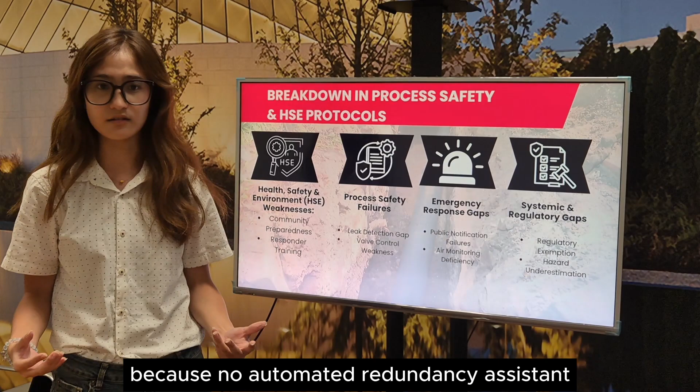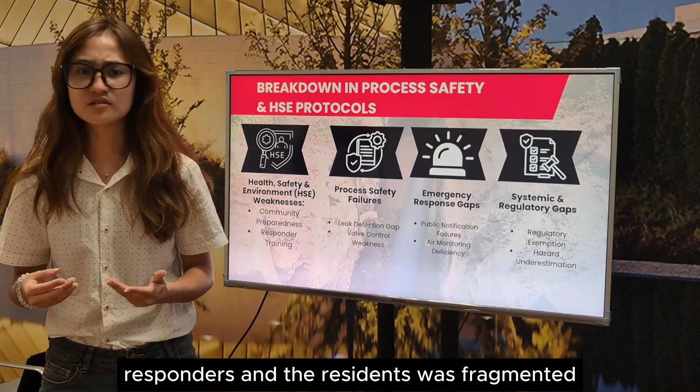The second issue is emergency response gaps, where public notification failed, air monitoring was deficient, and containment dragged until 8:22 p.m. Communication between the operators, responders, and residents was fragmented, leaving residents confused and unprotected.

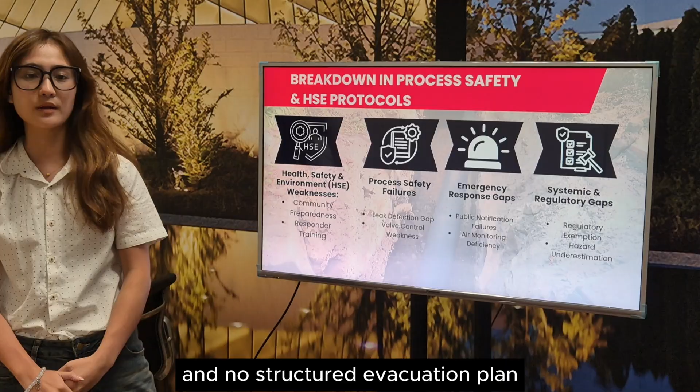The third point is HSE weaknesses. The community had no prior drills and no structured evacuation plan. Many didn't know carbon dioxide is invisible and asphyxiating, which prolonged exposure.

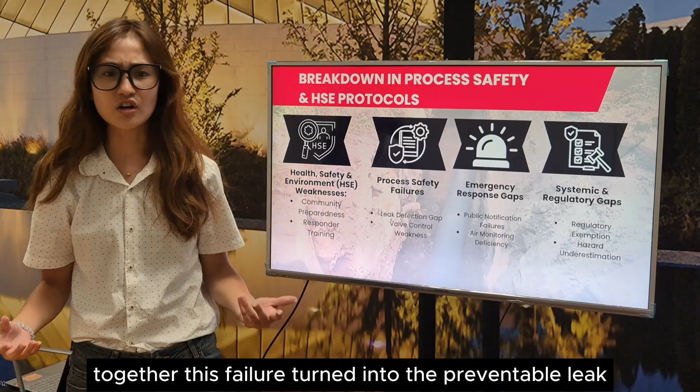Finally, there are systemic regulatory gaps where pipelines face lighter regulations than oil and gas. Hazards were underestimated under the non-toxic label, and management culture showed more focus on production than prevention. Together, these failures turned a preventable leak into a major public safety crisis.

After inspecting the pipeline, we found there are 4 major root causes of the leak: equipment failure, human and operation factors, design flaws, and systemic issues.

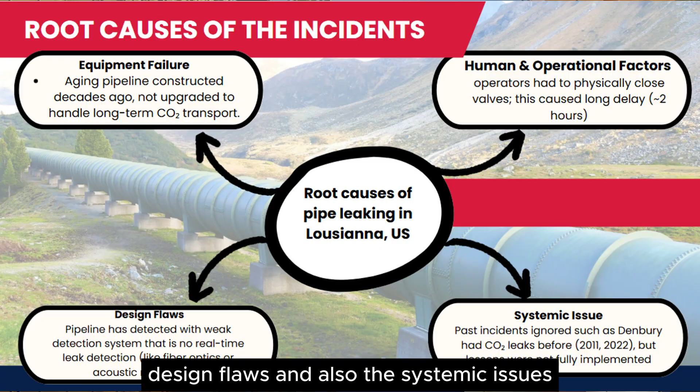One of the major root causes is equipment failure. The aging pipe was built decades ago and without upgrading for long-term carbon dioxide transport. Corrosion and wear from water impurities caused cracking, while monitoring equipment failed, cameras went offline, and sensors were insufficient.

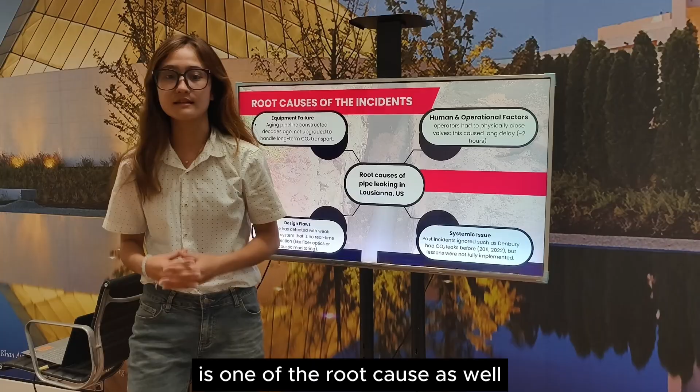Second, human and operation factors is one of the root causes as well. Delayed responses by hours without closing the valve, communication between control centers, field staff, and first responders was slow, and training on carbon dioxide leak behavior was lacking.

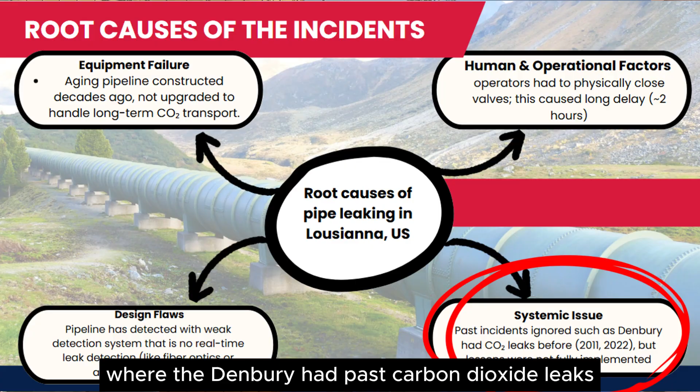The third significant root cause is systemic issues, where Denbury had past carbon dioxide leaks in 2011 and 2022, but lessons were ignored. Safety leadership was weak and continuous improvements were missing.

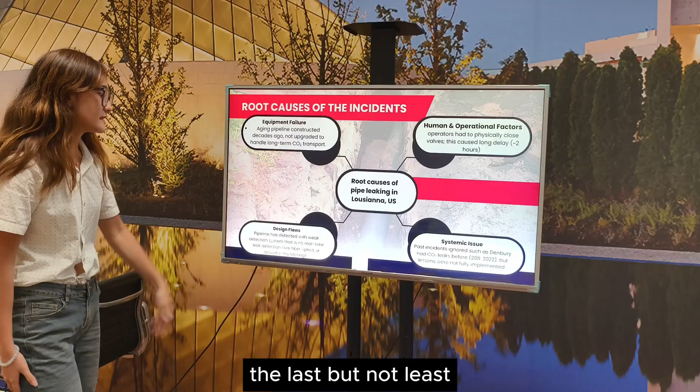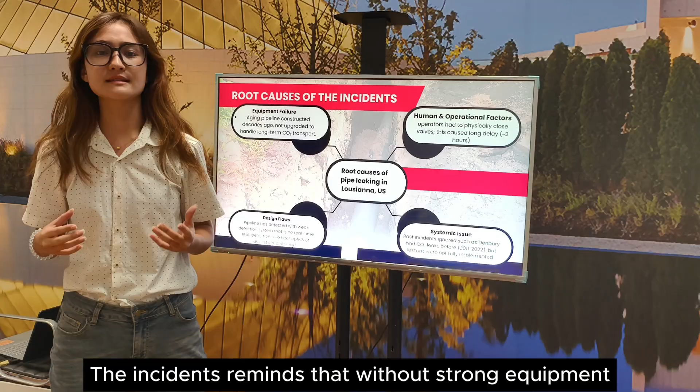Last but not least, design flaws is also one of the root causes, where the automatic shut-off valve had no redundancy and detection systems were too weak to provide real-time alerts. This incident reminds us that without strong equipment, operations, leadership, and design, pipeline safety cannot be guaranteed.

Today, we are proposing a safer and more efficient carbon dioxide transport and storage system for ExxonMobil Louisiana through 3 groundbreaking systems: AI plume modeling, smart monitoring, and automated containment.

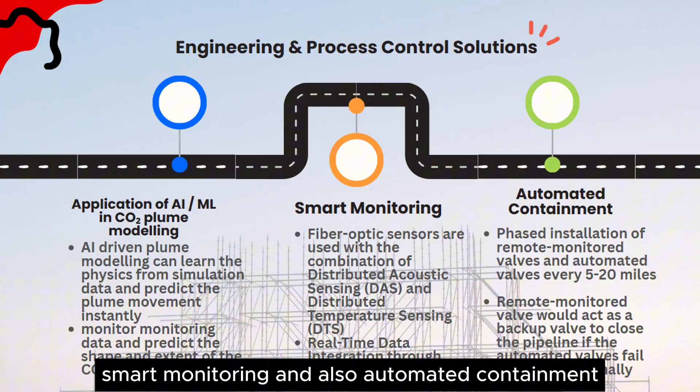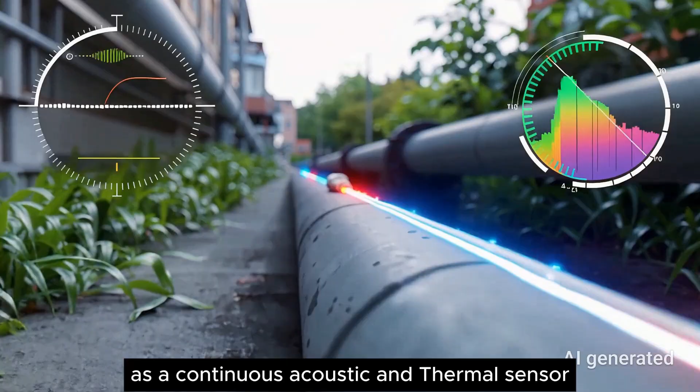First, smart monitoring. We have replaced sporadic patrols and spot sensors with always-on intelligent oversight. By using the fiber optic cable itself as a continuous acoustic and thermal sensor, we detect leaks and third-party interference in real time across the entire pipeline. This system doesn't just enhance safety, it also reduces monitoring costs by 35% over traditional methods, paying for itself while providing unparalleled protection.

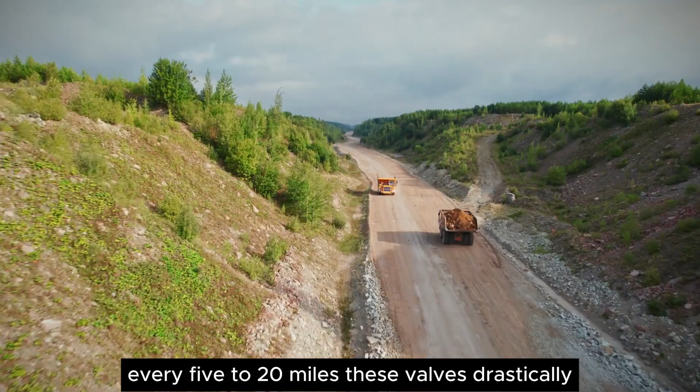Second, automated containment. Speed is critical in an emergency. Unlike manual valves that require crews to drive to remote sites, our automated and remote monitored valves can isolate any segment within minutes. Deployed in a redundant phased strategy every 5 to 20 miles, these valves drastically reduce potential carbon dioxide release volume. What could have been a major incident becomes a quickly managed event, turning catastrophic risk into predictable, controlled safety.

Third, AI-powered plume modeling. Traditional simulations are slow, expensive, and ill-suited for real-time decisions. Our AI models, developed with leaders like NVIDIA, run 100,000 times faster. They learn from real physics and simulation data to predict plume migration in seconds, not weeks. This allows continuous forecasting, storage optimization, and emergency planning without delay, turning modeling from a bottleneck into a powerful decision-making tool.

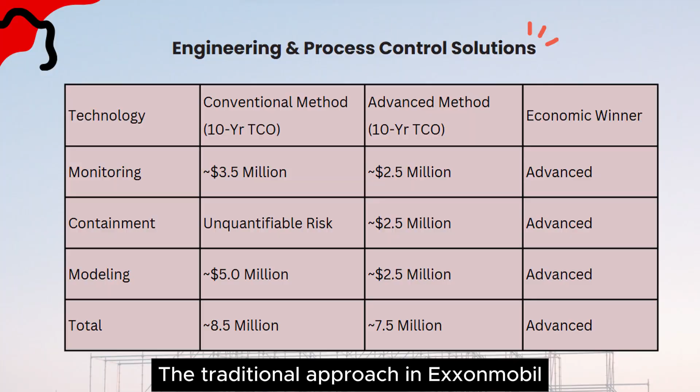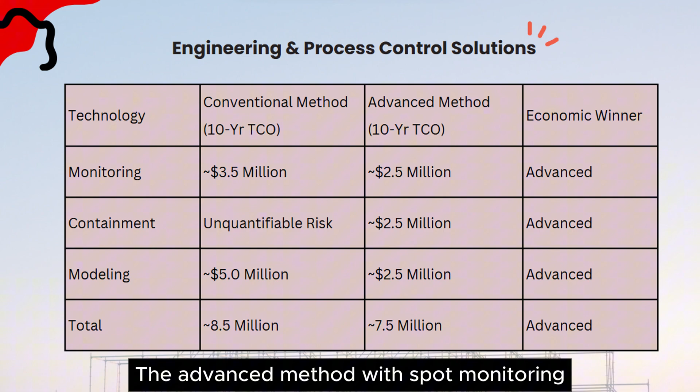Let's look at the numbers for our proposal. The traditional approach in ExxonMobil Louisiana, using conventional monitoring, manual valves, and slow simulations, carries a 10-year cost of $8.5 million and comes with unquantifiable risk. The advanced method, with smart monitoring, automated valves, and AI modeling, comes in at $7.5 million.

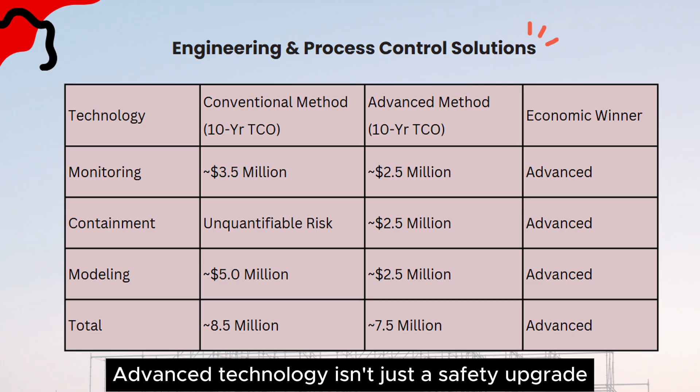This isn't just a $1 million saving, it's a strategic shift. We're replacing a high-risk cost structure with a predictable, proactive investment. Advanced technology isn't just a safety upgrade, it's a smarter financial decision that protects both the project and the public.

Technology alone isn't enough. HSE and emergency preparedness are also needed. We are integrating these systems with community safety networks, including sirens, mobile alerts, and live data for first responders. Besides that, annual drills, joint exercises with local agencies, and right-to-know policies ensure that everyone from operators to residents is prepared and informed.

We also actively advocate for stronger, clearer policies to ensure every operator meets the highest benchmarks. This means championing mandatory incident reporting, requiring all leaks and near misses to be reported within 24 hours. Transparency isn't optional, it's how we learn and prevent future issues.

We support independent third-party audits every 3 to 5 years. These aren't about finding faults, but about validating our systems, ensuring integrity and maintaining the public's trust. Furthermore, we believe in aligning with stringent international standards like ISO 27914 for carbon dioxide storage, creating a consistent global framework for safety. This is where technology meets responsibility.

By building smarter, embedding safety, and operating transparently, we are not just transporting carbon dioxide, we are delivering trust. And that's how we build our sustainable future together. Thank you.